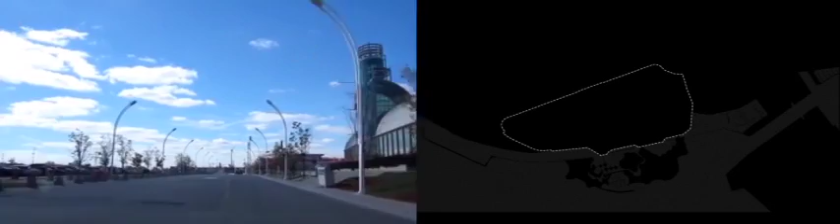Exhibition Place is a 78-hectare site owned by the City of Toronto. It is a landlocked campus of large venues for fairs and conferences, set within surface parking lots and some green spaces. Like Ontario Place, it is isolated, publicly owned, underused, and is currently planning new development. If we consider Ontario Place and Exhibition Place together, Exhibition Place could better connect with the water, and Ontario Place could better connect with the city.

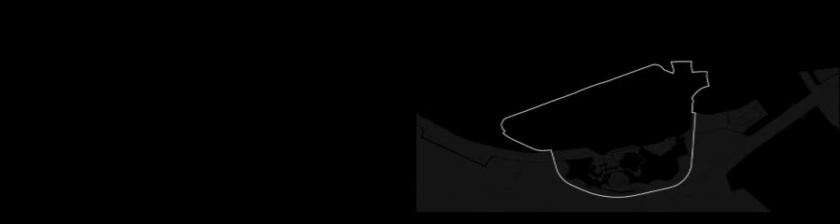A partnership between the province and the city would enable a coordinated redevelopment strategy that can bring new life to a larger area of the western waterfront. Before any development goes forward, both levels of government must work together to establish clear directives to structure new growth. What form could the planning process take?

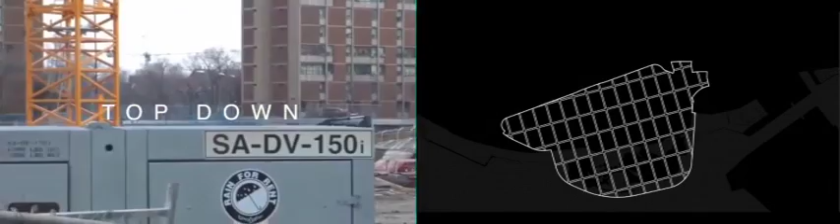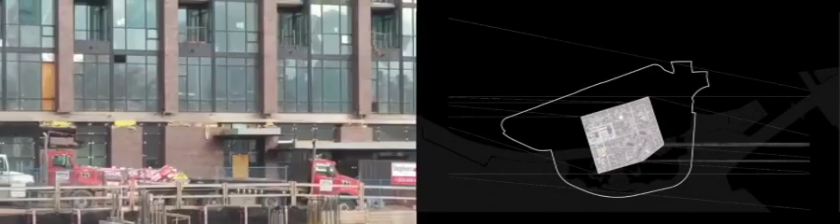A strictly top-down approach, the total large-scale master plan, often results in development that is out of touch with the human scale, context, and the changing needs of a city. At 1.2 square kilometers, the combined area of Ontario Place and Exhibition Place is 4 times the size of Regent Park. The old Regent Park suffered from a total master plan that turned away from the city and created too many undefined and unvaried spaces. The new Regent Park, redeveloped through a public-private partnership with a single developer, is similarly alienating and relentless.

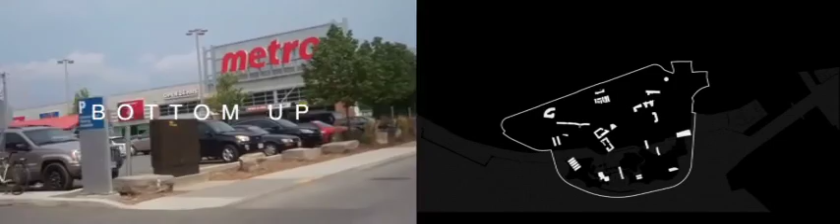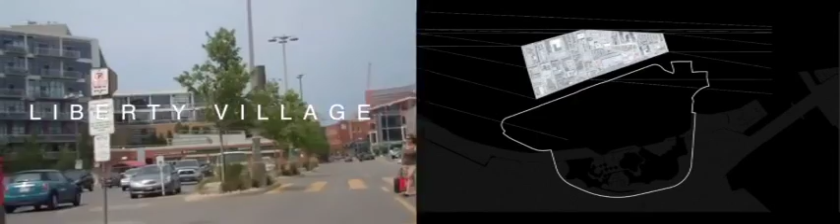A strictly bottom-up approach can be inefficient and result in incohesion and missed opportunities. Liberty Village has seen significant growth in the past decade. The former industrial area was cut off from the rest of the city. Despite recent development, connections have not been improved. Instead, the poorly considered mess of condo towers, strip malls, and suburban townhouses is all too happy to ignore the city around it.

To avoid similar mistakes, it is important to develop a planning process that allows for both coordination at the large scale and organic growth at a smaller scale. Neighborhoods that work, like Kensington Market or the Annex, have diverse ownership, and development occurs at a smaller scale. While the scale and scope of OPEX make involving the private sector a reality, handing off major planning to a private consortium comes with great risk. Developers plan for profit, not for public improvements.

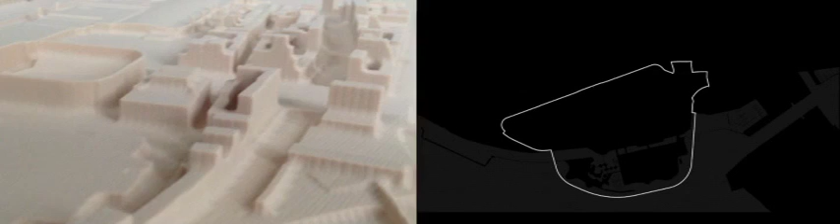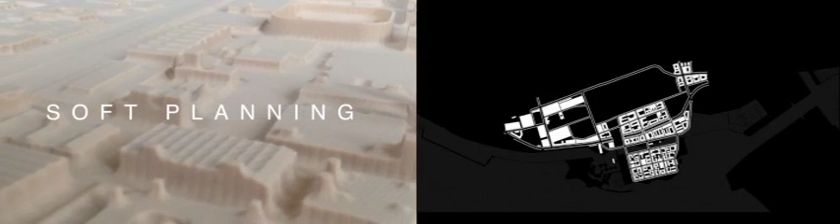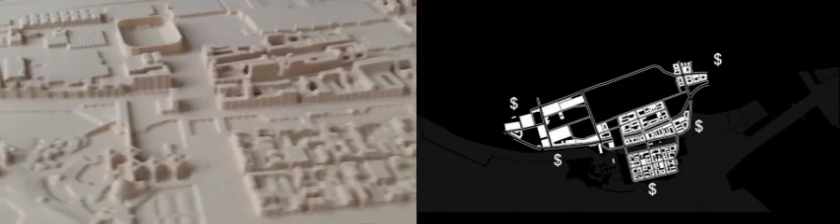For OPEX, the planning framework is the responsibility of the public sector. Hard planning sets out an urban fabric, transit, and open spaces. Soft planning, rules like zoning and building criteria, ensure a mix of uses in good buildings. Smaller-scale private development is encouraged by lower land prices and other incentives. Plot by plot, new growth brings necessary life and revenue.

Streets are a city's connective tissue. They provide access, orientation, and the space for social and economic exchange. Good streets are active, support a variety of uses, and are well defined by a continuous street wall. A good fabric optimizes connections, transportation, and distribution. At OPEX, the new fabric fits around existing buildings and builds on existing connections, creating a variety of block sizes.

There are different types of streets in the area. The north-south minor arterials, Dufferin and Strachan, are improved and extended to create better connections with the city. Lakeshore Boulevard is maintained as an east-west major arterial. Parallel to, but one level above the boulevard, are generous sidewalks. Streets cross over Lakeshore to minimize intersections.

A web of local streets further connects the site, and laneways provide service access and a pedestrian network. Along the water, streets become quays, with recreational trails and walks at the water's edge. A grid is introduced on Ontario Place's East Island to allow for new development.

Streetcar lines are extended through Exhibition Place and down to Ontario Place, connecting east to Union Station, west to Roncesvalles and up Dufferin to the north. A transit node forms at the Exhibition GO station, tying into a regional network.

Currently, the site is largely open space, much of it underused and undefined. Good urban open spaces, like good streets, are well-defined, active, and support a variety of uses. Open spaces should be interconnected and varied in size, small, intimate courtyards and large collective plazas. Framed by buildings and lined with trees, they become urban outdoor rooms.

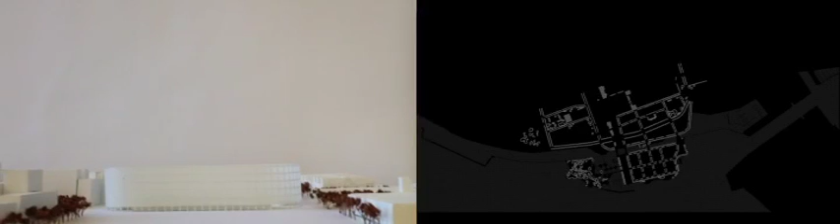The multi-purpose, flexible open space required by events like the CNE and Indy are reconfigured, but the total area is maintained. Surface parking is consolidated to local streets and new parking structures.

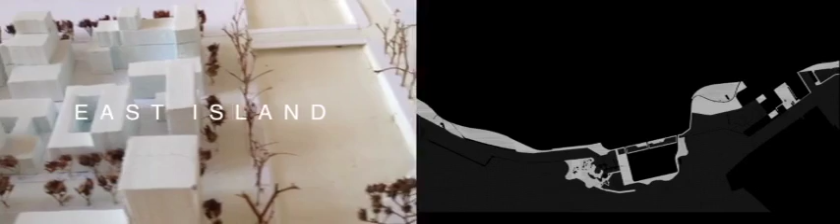At Ontario Place, the West Island is maintained as a green space open to the public. The East Island is developed, but as a porous neighbourhood with a network of lanes and courtyards surrounded by a highly public edge of parks at the water. Public amenities, boathouses, pools, cafes, the existing pods and marina, line and activate the shore. The northern edge of East Island is landfilled, narrowing the water to create a canal.

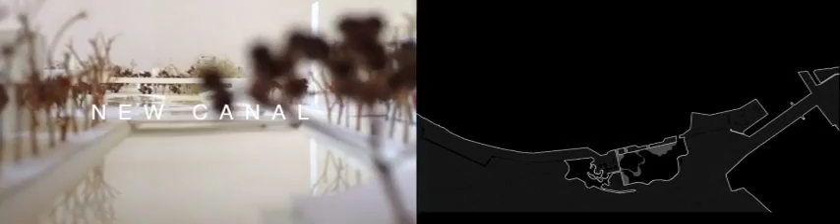A mix of uses ensures a mix of people throughout the day. When uses are layered and in close proximity to one another, neighborhoods are vital and active. Most of OPEX is zoned for commercial residential mixed use. Plots are sized to accommodate a range of building types. To the west, along Dufferin Street, plots are generously sized and zoned for employment-led industrial. This provides space for startup companies, contributes to a resilient local economy, and creates manufacturing jobs downtown.

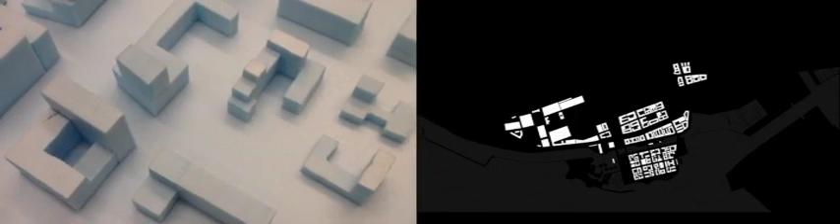Good buildings live. They breathe and are full of light. They are flexible, accommodating changing uses over time. Good buildings are also, in a sense, invisible, the backdrop for city life. New buildings at OPEX should not be flashy or loud, but work well, quietly. Zoning and building criteria can help shape good, background buildings.

Stepbacks are dictated by sky exposure planes based on street width and orientation. The street wall is maintained by a minimum frontage on street lot lines. Setbacks are allowed on side lot lines and lanes, and a minimum is mandated when walls have windows. The maximum floor plate depth is 14 meters for residential to ensure light-filled and cross-ventilated rooms. Courtyards are a minimum 11 meters across.

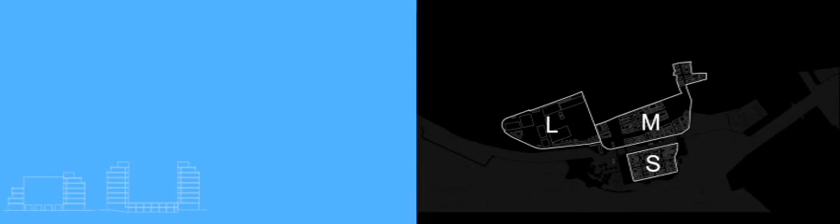Floor heights are also set, 5 meters minimum for the ground floor and 3.5 meters for all floors above. Building criteria can also dictate the percentage of openings relative to orientation and mandate the use of durable and sustainable materials.

Development will happen over time. Neighborhoods determine phasing. Gore could be the first step. It connects to the city north on Strachan and continues waterfront development from the east. A mixed-use area, it conforms to a palatable model of mainly residential development.

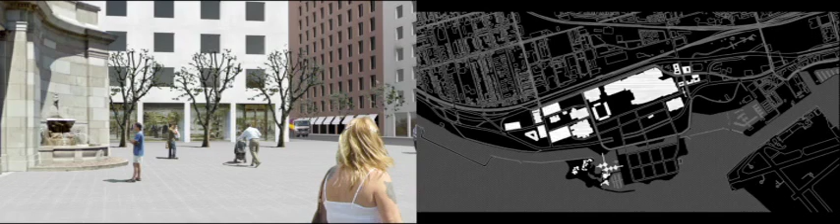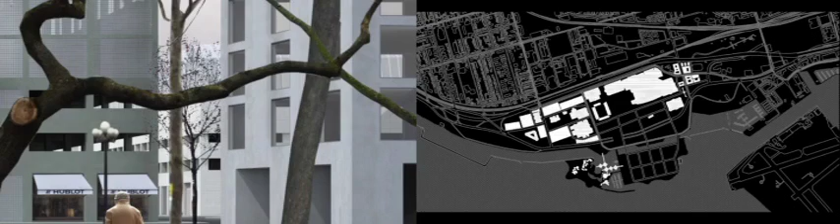WestX creates jobs, bringing people to the area. Located to take advantage of existing infrastructure, its large plots accommodate industry. The first few floors of large buildings are used as Exhibition Place parking.

Exhibition Place reconfigures its open spaces. Midway is a wide north-south axis that connects to the lake. This space can host the CNE's rides and games, concerts and fairs, rallies, and sport events. Existing buildings are improved, and the stadium gets a new skin, creating an OPEX landmark.

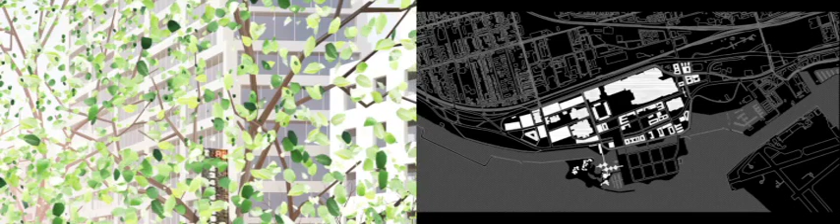Exhibition Place's southeast is developed into ShoreX. Built on and around Lakeshore Boulevard, it continues to the water's edge. Many buildings have office space in them. The height allowed along Lakeshore Boulevard creates taller buildings with views over the city and lake.

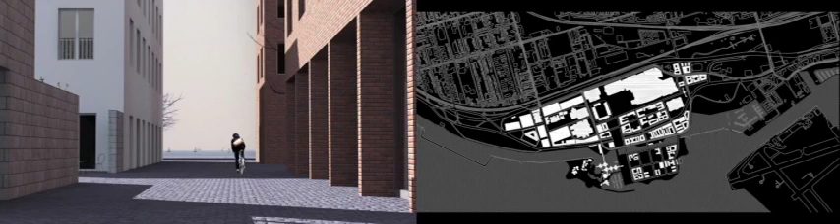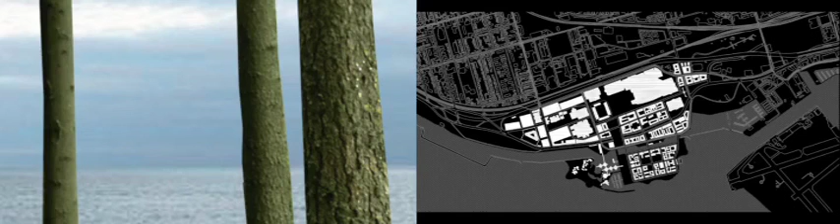East Island is a fine-grained, mixed-use neighborhood. Laneways open onto intimate courtyards, narrowing again as they make their way down to the water's edge. A continuous park wraps around the island. The West Island evolves over time into a large, wild park. Existing structures are selectively repurposed for public uses. Many are left as ruins, follies along the rambling paths. The new canal is Ontario Place's link to the city.

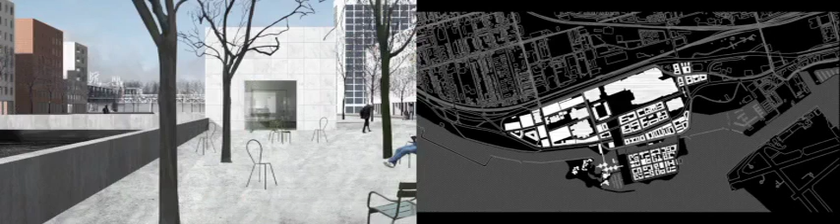Revitalization at Ontario Place depends on its integration with the city. It did not survive as a fledgling destination, nor could it in the future. Working with Exhibition Place and the City of Toronto allows that integration to be coordinated and intelligent.

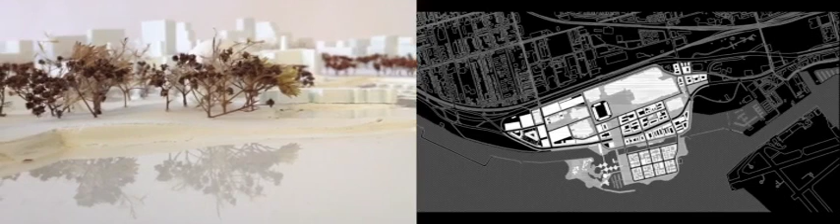A municipal-provincial partnership develops a planning framework that lays out an urban fabric and ensures a variety of quality open spaces. Zoning and building criteria are established to shape private development. Over time, a series of neighbourhoods forms around Ontario Place and Exhibition Place, bringing life to the western waterfront.